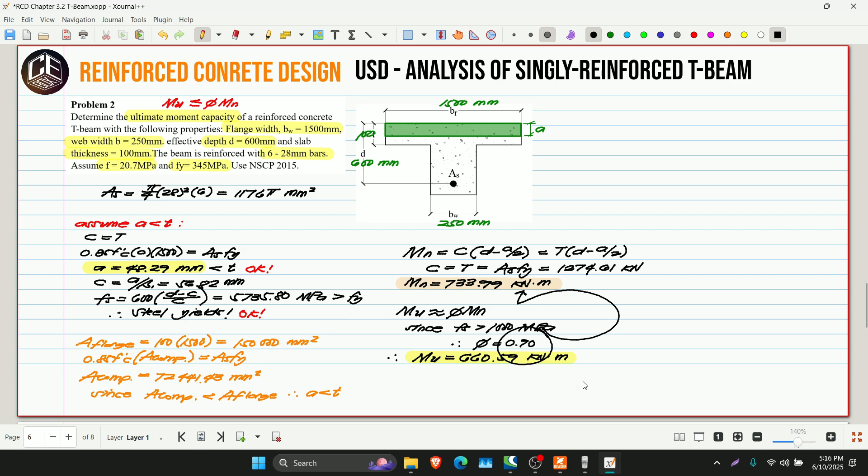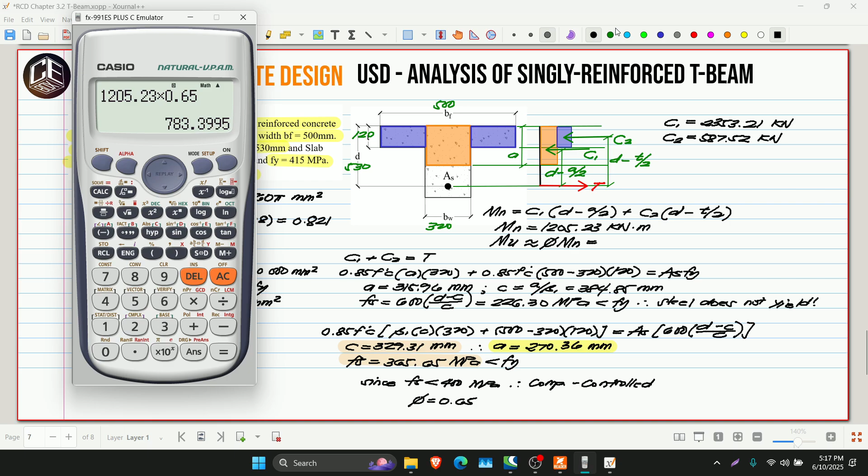So therefore, yung ating ultimate moment na approximately equivalent to our design moment na phi MN is equivalent to 1205.23 times 0.65. So this is 783.40 kilonewton meter.

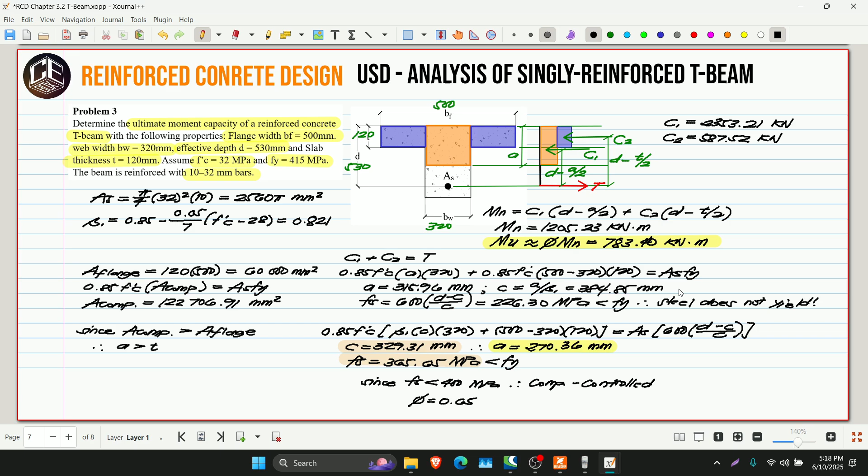Okay, so this is our problem number 3 for USD analysis of singly reinforced T-beam. So that's our example problem. We hope na marami kayong natutunan at naintindihan sa aming video tutorial.